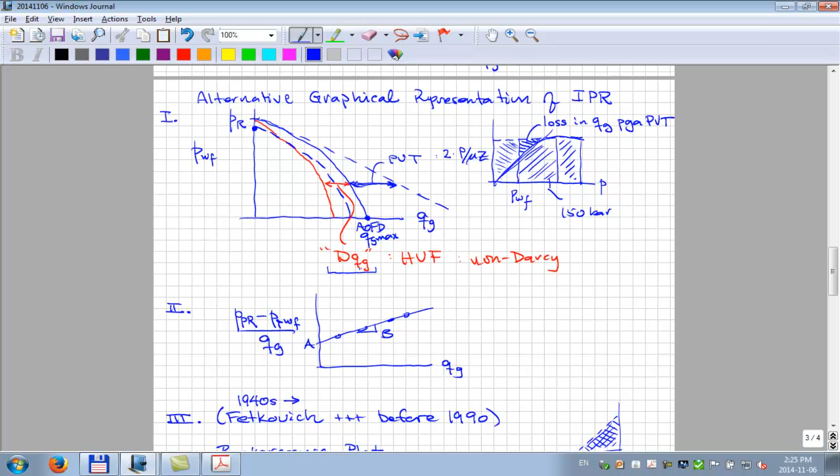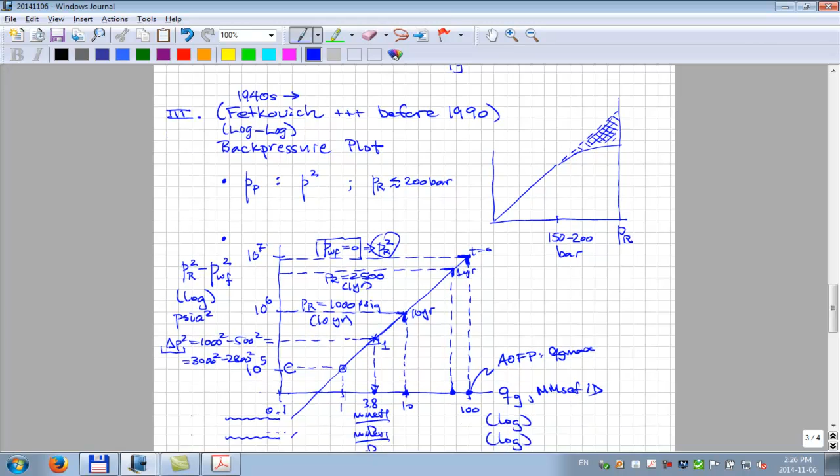Okay, so the rate equation, including the effect of non-Darcy flow, sketched here in red, shown here in the second plot. How do we handle this BQ squared term using a log-log back pressure graphical analysis? I'm going to show you how that's going to work.

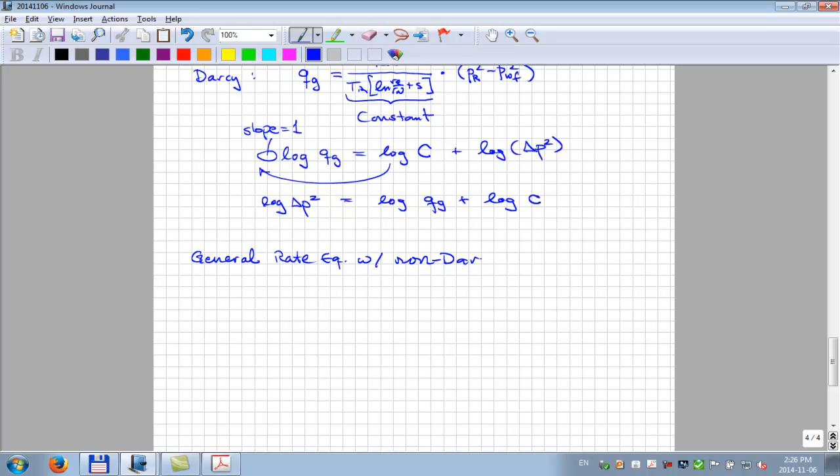So the general rate equation with non-Darcy term. So if you take that equation and plot...

I'm going to actually add... okay, so I'm going to put in how this curve will look.

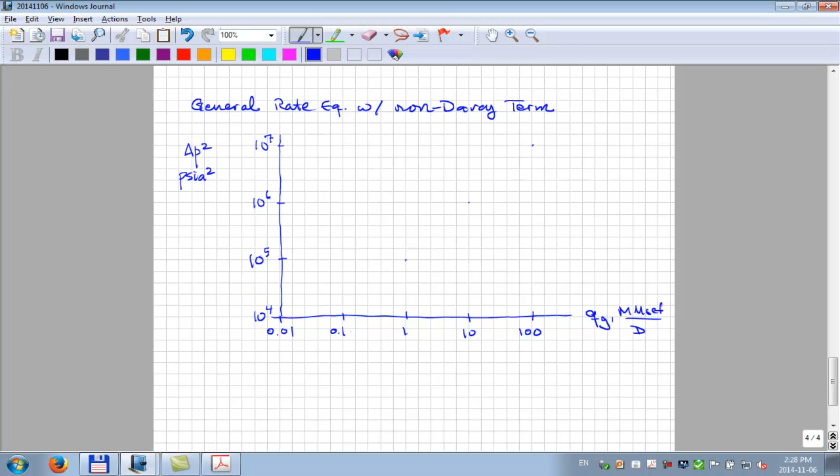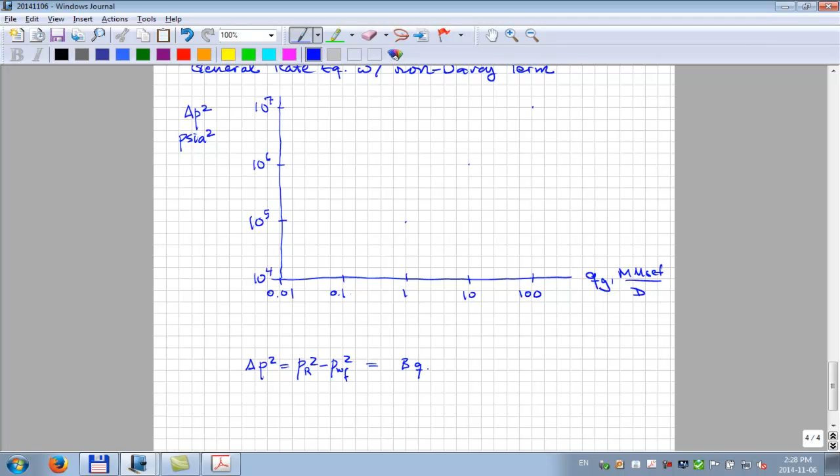If you go to low enough rates, the DQ or the BQ squared term becomes insignificant. Let me just rewrite the equation here. So delta pressure squared, PR squared minus PWF squared, is equal to BQ squared plus AQ. And in the limit of QG going to 0 or to some small value, that basically approaches AQ, right? The QG squared term becomes less important.

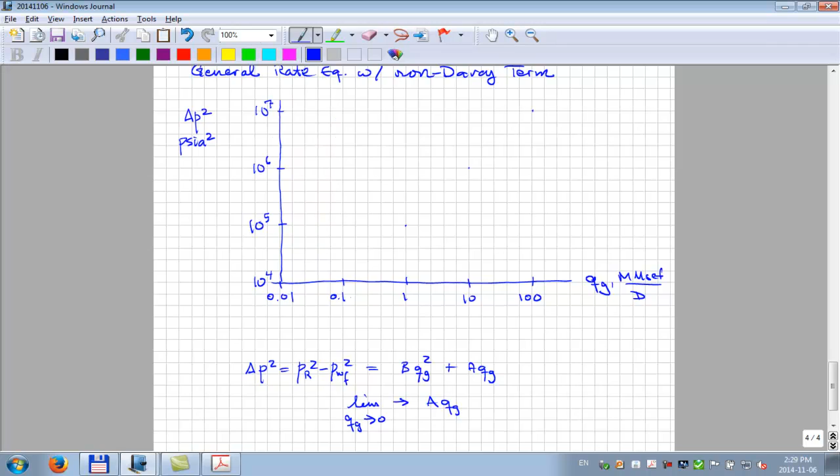So at low rates, you're going to get effectively this slope of 1, okay, at low rates.

But as the BQ squared terms, as the rate gets higher and higher, what's going to happen is that you're going to get larger and larger pressure drops. And I'll just sketch in kind of what would happen if you didn't have non-Darcy effect. Okay, so that's going to be no non-Darcy. Another way of saying that is that it's Darcy only, okay.

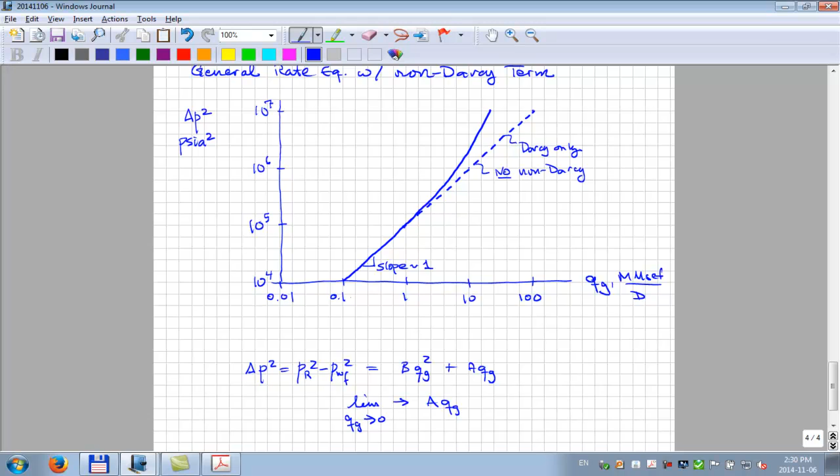But what actually happens is that this thing starts curving, like that. And as that rate becomes really large, the BQ squared term dominates. So in the limit, as QG gets very large, then the delta pressure squared goes towards BQ squared, right? That's the pressure drop. And in this case, the slope is equal to 1.

But here, the slope is going to be equal to 2. Because when we take the log of that term, the 2 is going to come out and you're going to get 2. So this slope here, the limiting of that slope, approaches 2. So this is the generalized equation, and you basically have this transition from slope of 1 to slope of 2.

Now, I'm doing this by eyesight, I mean, but that's what you end up getting, okay.

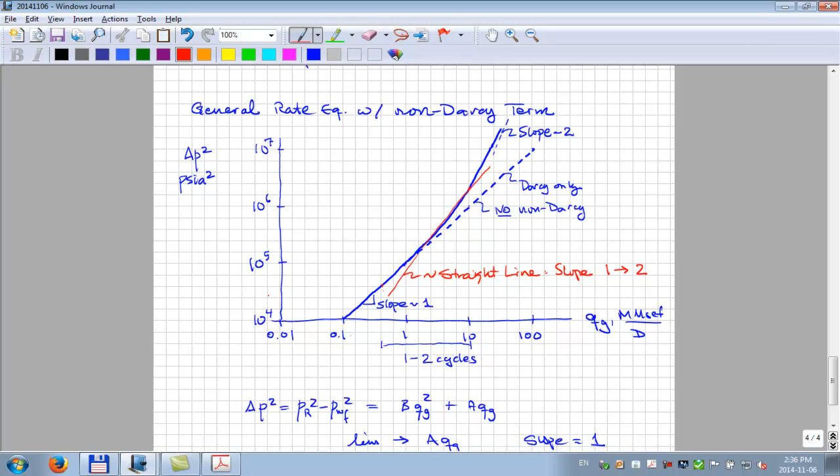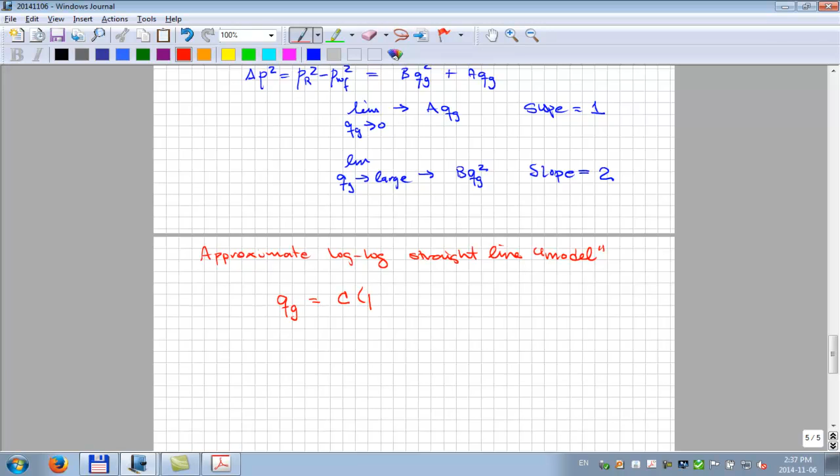And that straight line will have a slope, okay, somewhere between 1 and 2. And the equation describing this straight line, the approximate straight line log model, is QG equal to C times PR squared minus PWF squared to the power n.

Where the slope on that plot is just equal to 1 over n. So that means n will be varying from 1 to 0.5. Here we have Darcy-like flow. Here we have basically BQ squared domination, or highly non-Darcy. So BQ squared is the dominating term, and here AQG is the dominating term.

So if you make measurements on a well and the slope from the multi-rate test has an n of 1, that suggests the non-Darcy effect in the first 1 to 10 meters is negligible. But if the slope is 0.6, that suggests there's a lot of effect of non-Darcy flow near the well.

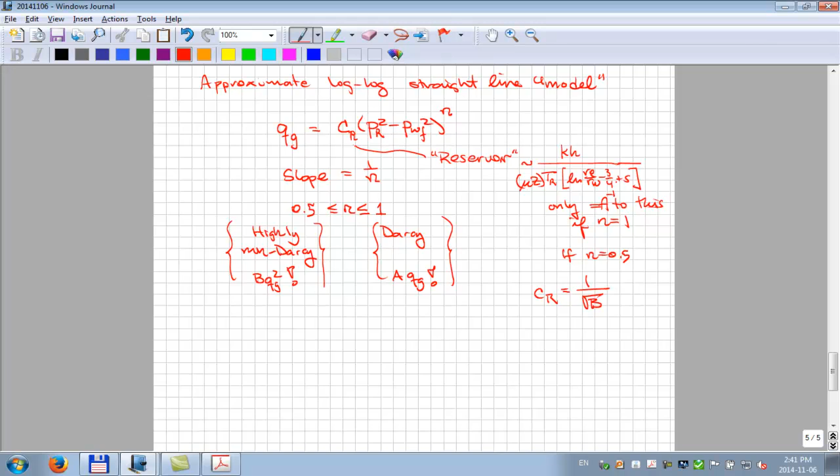And if n equals 0.5, which it essentially never is, then that CR would be equal to 1 over the square root of B. It's only equal to A, which is what that term is — or would it be 1 over A? I think that'd be 1 over A. If n is equal to 0.5, then CR would be equal to 1 over square root of B.

So, if we want to decrease the effect of this non-Darcy skin, you have to change the rock. It's effectively a rock property.

Now, in theory, driller's damage can magnify the beta — it can magnify the effect of the non-Darcy term. So if you're able to clean up some of the driller's damage, then that skin could go to 0, and the value of B could also be altered because they're kind of related.

I mean, D is proportional to beta, and beta is proportional to 1 over K from measurements. So if you lower the permeability in the first meter, you're increasing beta — you're making D bigger, you're making B bigger. If you remove that damage, beta goes down, D goes down, and B goes down. But it doesn't disappear.

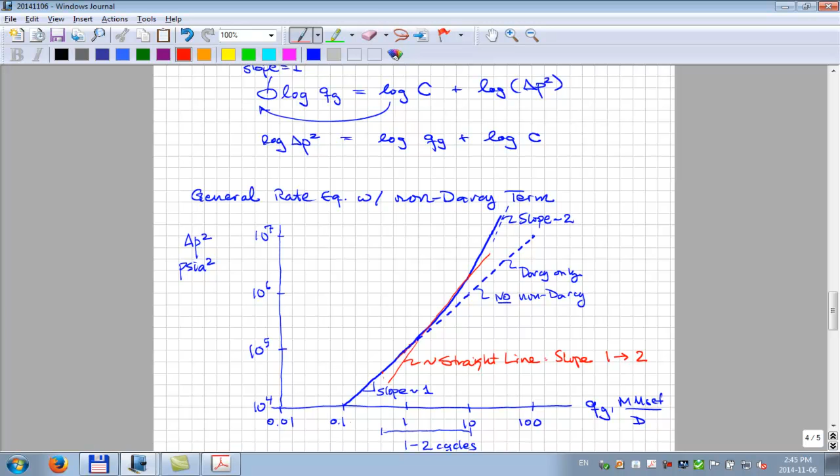This is an approximation. It's used extensively in the literature and in engineering, at least until 1970, into the 1980s. It's not used much anymore because we can solve a quadratic equation very easily. But it's discussed in the Fetkovich paper. It has historical significance, and it's a diagnostic—an easy way to find out whether this effect exists.

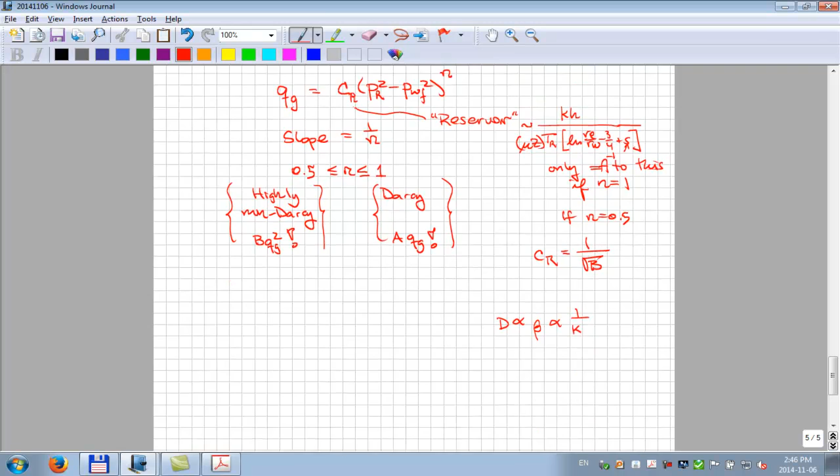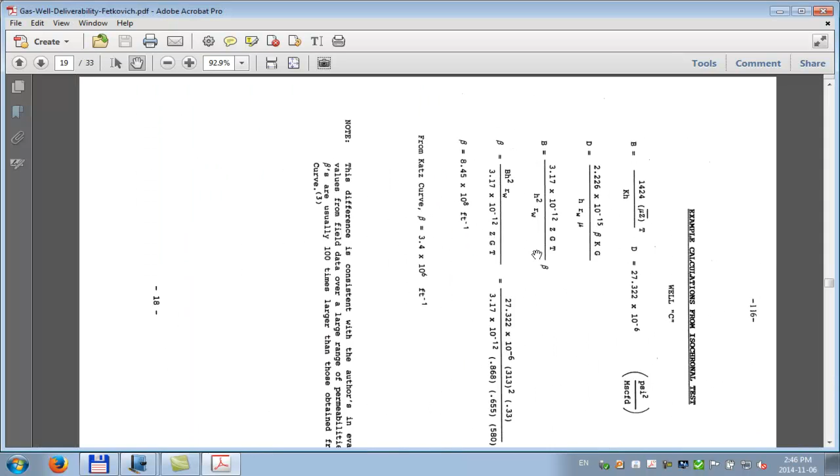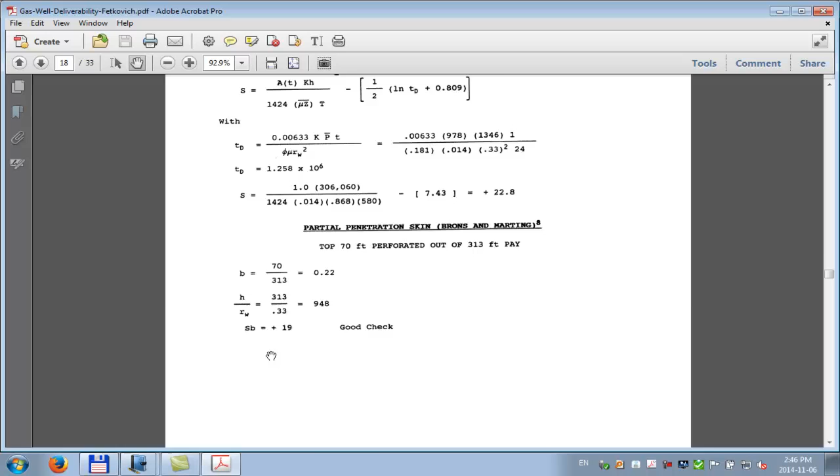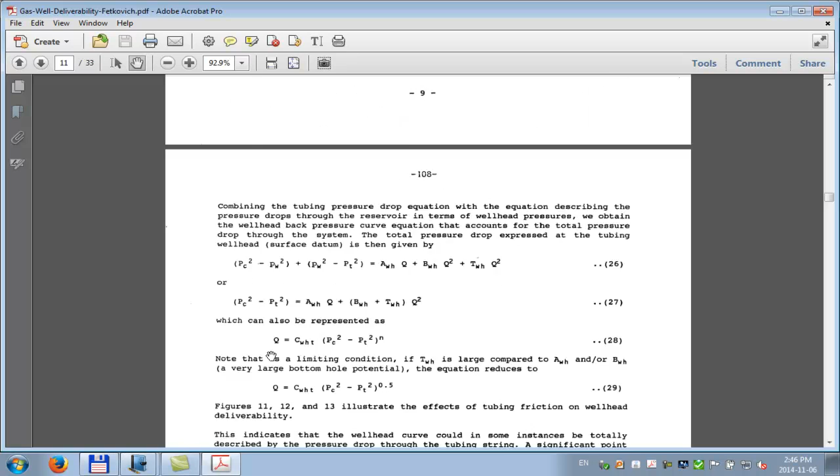Now, I think in the paper, if I can find it, I'll see a comment. Oh, I got to reverse this. Somewhere here it is, this table here.

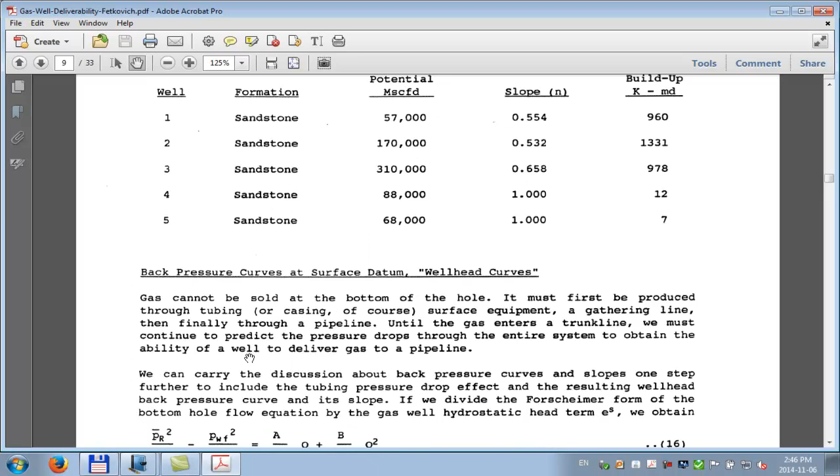This is just an example from 5 big gas wells in Phillips Petroleum, from when this paper was written, around 1960-something, I think 1970. And what you can see is the back pressure slope—it's not really the slope, it's the N value. It's close to 0.5 on these first 3 wells, and very close to 1 on the last 2.

But you see the level of permeability here. And he makes the statement somewhere that generally speaking, this effect is most important for high permeability reservoirs. The reason is you're making really big rates—88 million, 68 million—from these 2 wells, where it just looks like there's Darcy effect. But that's because these are very thick formations, so the velocities just don't get that high. These others are high permeability but thinner formations, so they make really big rates through a smaller section, and the velocities are much higher.

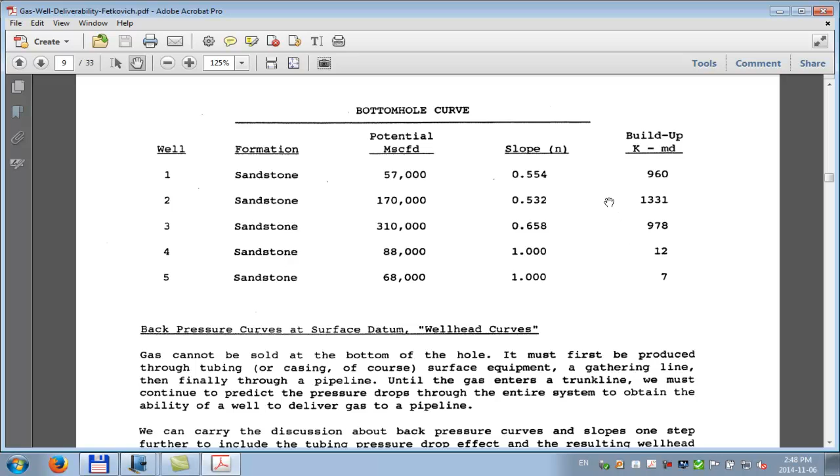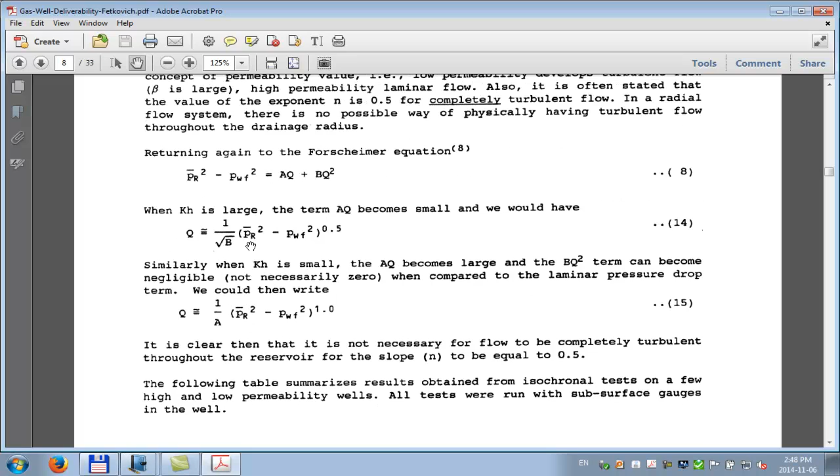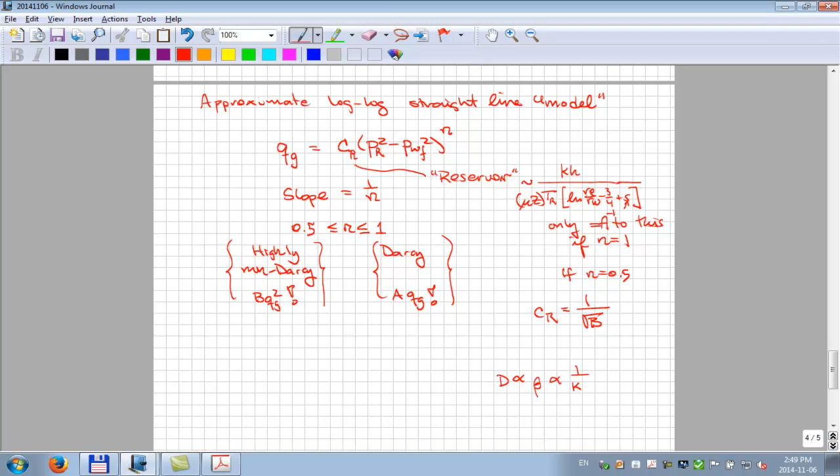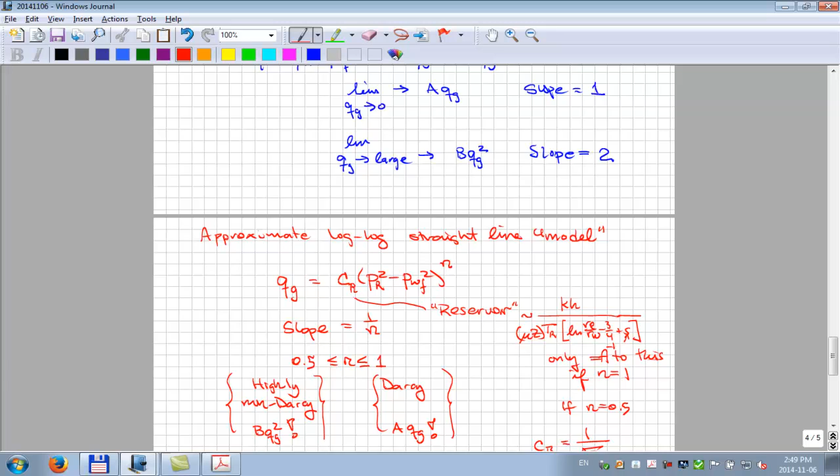Anyway, that's something that's mentioned somewhere—I don't know where he talks about it, but okay. Let's see here. Okay, so I think this is pretty much where we need to get. Just trying to think if there's anything else... I think that's mainly it.

Okay, so now we can go into the second part of the paper, and that's basically flow in pipe flow. The first type of pipe flow he talks about is in tubing, to get the gas from the well bore to the surface. And the second type is pipeline, or gathering line, maybe more appropriate.

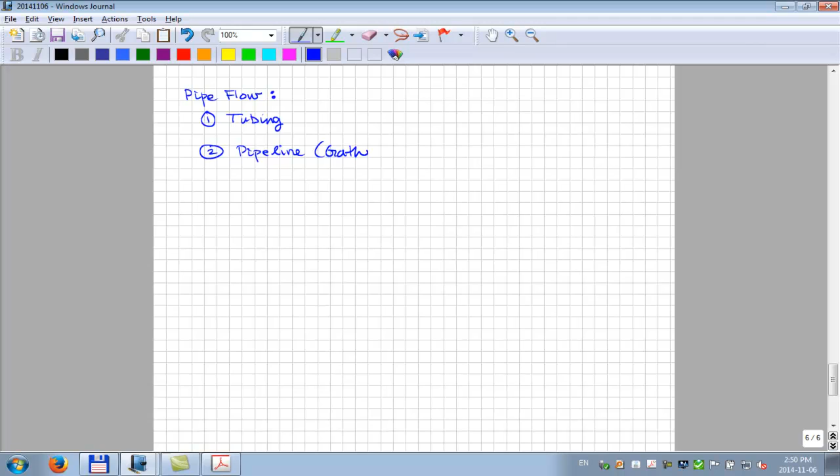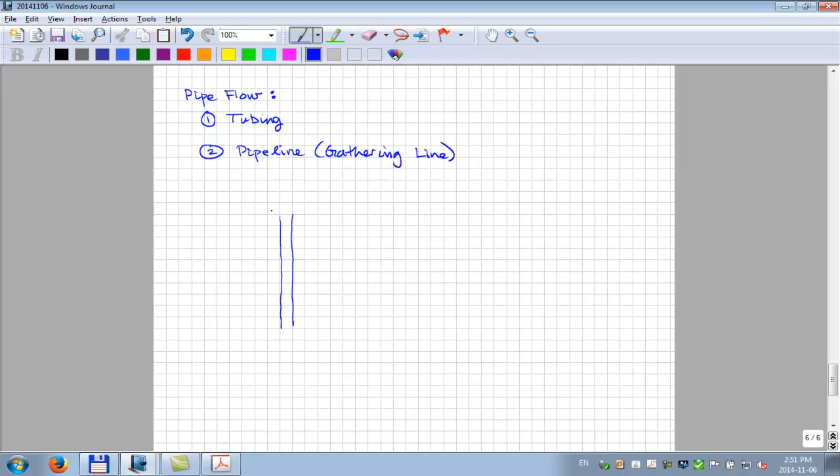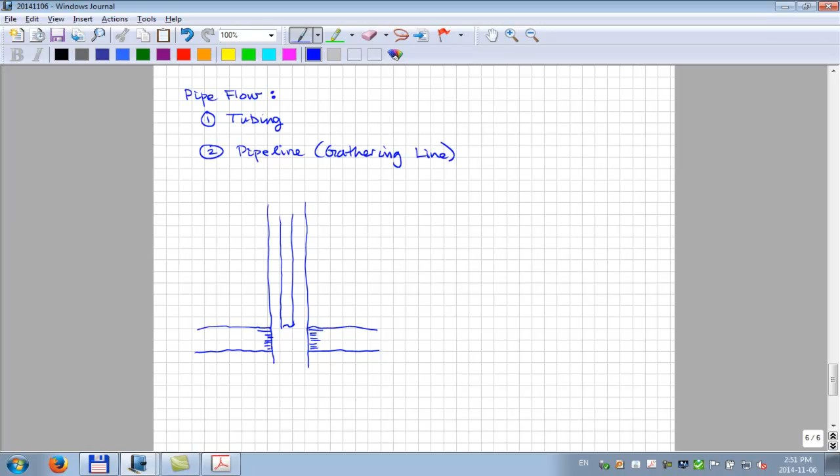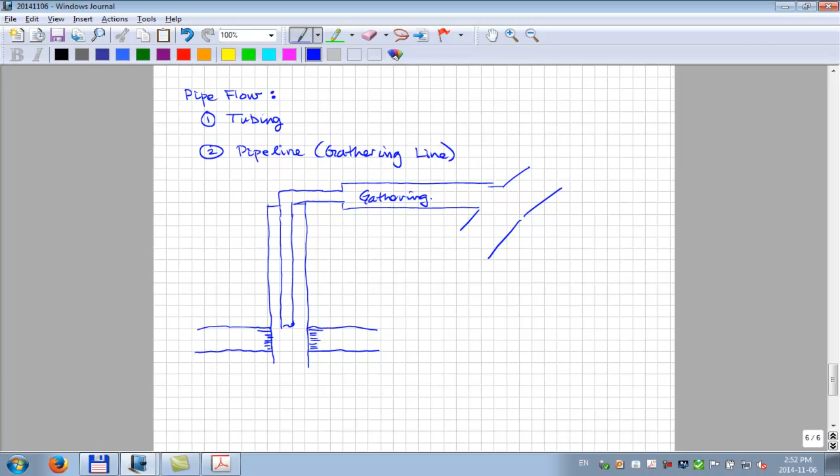So you've got this production tubing inside the casing, the formation, perforations into the rock, and there may be a gathering line to take it to the bigger pipeline. The diameter of this gathering line could conceivably be larger or smaller, to connect into the major pipeline. So this would be our gathering line. It could be shared by other wells, but for convenience of the analysis, we're going to just say this well is being gathered into the pipeline here.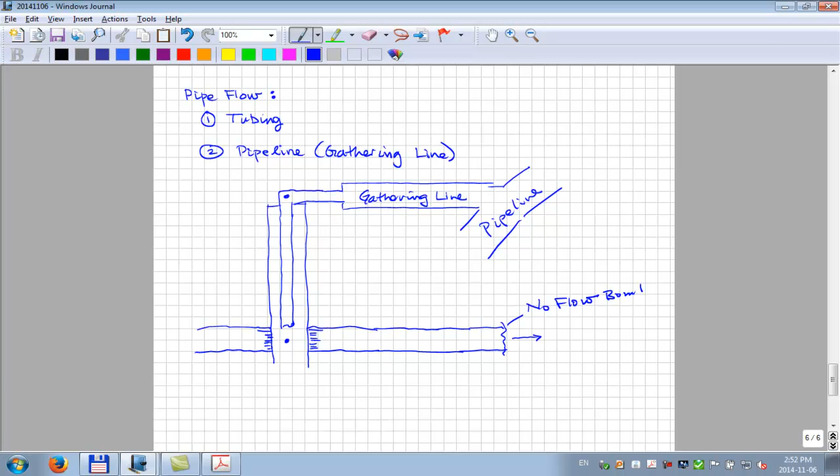And we're going to look at the different pressures here. Let's say this is our no-flow boundary, so gas over here is flowing towards another well. This is our bottom flowing pressure. This we refer to as the flowing tubing pressure—I think we've already talked about this. This is the flowing pressure in the annulus. We call it PW—at least that's Fetkovich's nomenclature.

For the purpose of what we're going to talk about in class, I'm not going to bring in the gathering line part. Now, what you can say about pipe flow, as a first order model of pipe flow, is that if you ignore gravitational effects—so we're basically saying flow is horizontal, or flow can be vertical but we're going to subtract away the pressure drop due to gravity—either way.

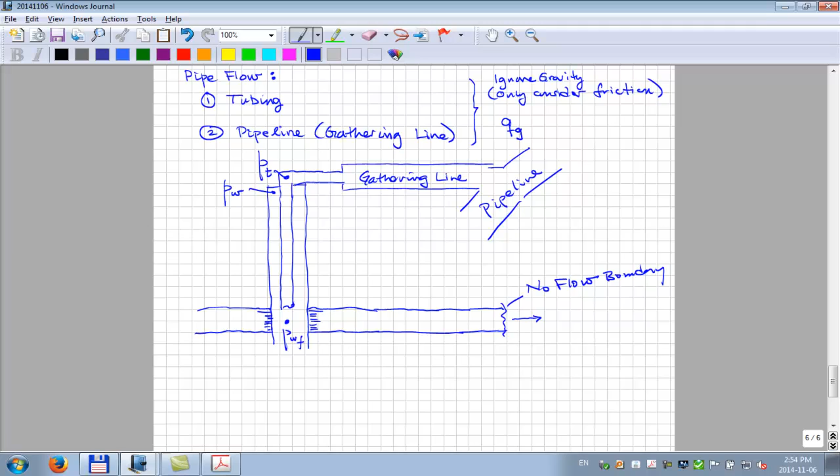So if you ignore gravity, another way of saying that is you only consider friction. Then what you can show is that gas rate is given by a very simple equation for pipe. I'll write C for the time being, that the pressure going into the pipe squared minus the pressure going out of the pipe squared, to the power of 0.5. That will get you first order right in any pipe having gas, even if it's carrying some liquid with it, and it's first order because this is Mother Nature. This is the way it works.

Gas rate here is in standard cubic meters per day or standard cubic feet per day. And these two pressures, all that matters is that they're at the same elevation. There's no reason for a difference in pressure because one is here and another was higher.

This is fully turbulent flow. We almost never have laminar flow of gas in pipelines. It's almost always turbulent flow.

Okay, and C, what is it going to be a function of? Let's try to figure this one out in our mind. C is going to be a function of primarily what? The diameter of the pipe. You put a straw, there's going to be a big pressure drop. You put a big old pipe diameter, there's not going to be much pressure drop. So C, which is kind of inversely proportional to diameter, is definitely going to be a function of diameter of the pipe. What else?

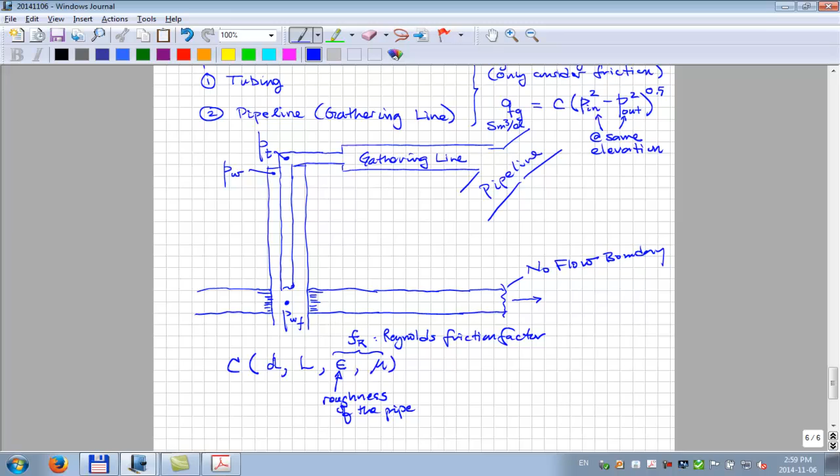So maybe the percentage of liquid coming from gas - if you have liquids with it, that could cause extra pressure drop. But we're just saying dry gas, just to make it simple.

Now what we're really interested in is the pressure drop from here to here. The problem is that we've got the pressure here, maybe what we call the true vertical depth, which is not necessarily the same as L, because it could be a well like that. But the true vertical depth here, I'll give the symbol H, total height - I don't remember what Fetkovich uses, but just call it H. It could be kilometers, many kilometers. So the pressure difference between PT and PWF, because of the density of gas in this very long vertical depth, has to be taken into account, because this equation only applies if these pressures are at the same level.